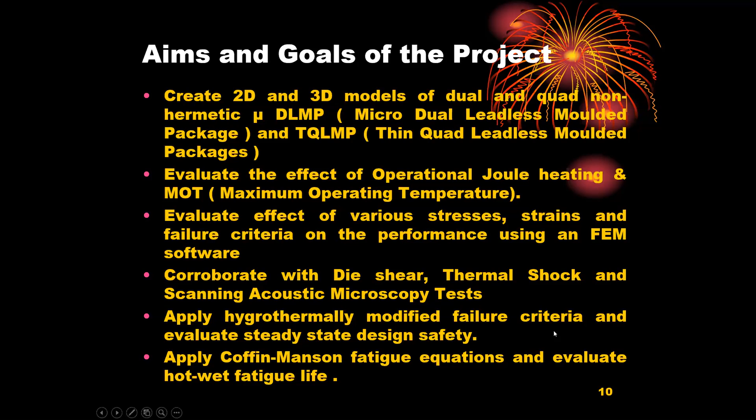In a nutshell, the goal is to conduct a slightly complicated novel electro-hygrothermo-mechanical steady state and fatigue durability analysis of the designed, developed, and manufactured micro DLMP and TQLMP IC packages.

Coming to the Microsystems roadmap for those who are slightly away from the subject, I don't presume that everybody is from materials engineering, reliability, and microelectronics.

The miniaturization part actually consists of small outline packages, then quad packages with no leads, quad flat packages with no leads, and then wafer chip scale packaging, known good die packaging, and others.

The high pin count, high speed roadmap is more concentrated on the BGA and the package on package, and then other kinds of system on system, high density, 3D high density, and other packages.

When I completed the work, it was well before 2015. So this roadmap has been constructed keeping my work in mind, and in case there are stalwarts, please excuse me, because a lot of things have happened beyond 2015.

We are looking at QFNs which were beginning to be made, manufactured, and popularized and commercialized after 2005. By 2010 or 2015, they had reached their full growth and maturity. They say QFNs are not meant for decline, I don't know, I'll take a call on it later.

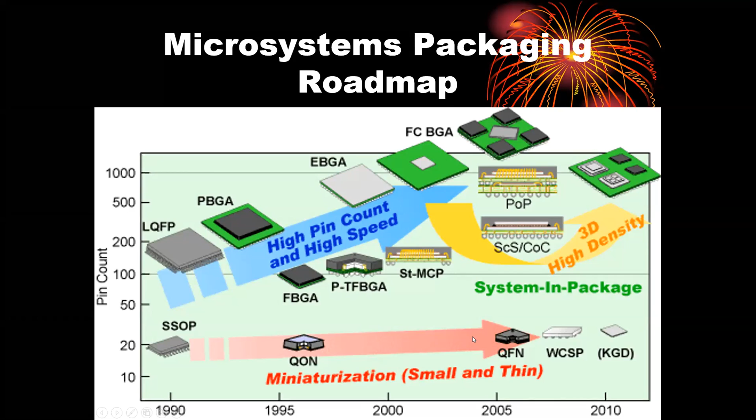Coming to the device applications of micro DLMP and TQLMP ICs, the surface mount technology is the place where you find lots of TQLMPs and micro DLMPs. They are used in video streaming.

They are used in automobiles, biomedicals, mobiles, laptops, tablets, aerospace, and other electronic sensor and PCB applications, where lower speed, lower density, and miniaturization are the characteristics.

So the background of the analysis I want to discuss today consists of certain considerations that were very important before we did the work.

In principle, we are looking at the influence of maximum operating temperature, Joule heating, I-squared-R losses, and these losses that cause thermal strain, which can make the system warp or twist, and the thermal strains in turn cause structural deformation.

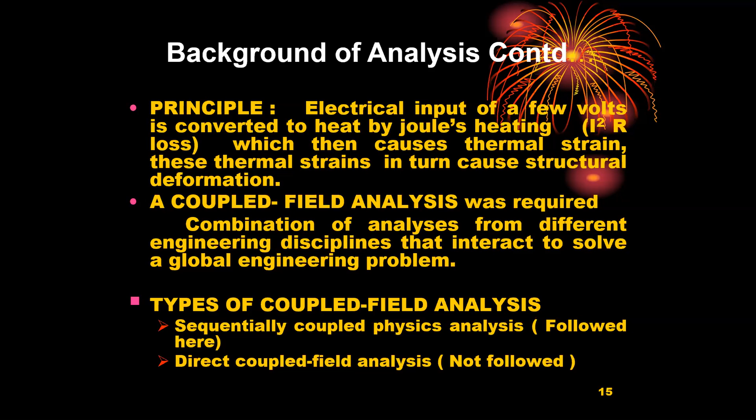We had to do this first in ANSYS: an electrical to thermal analysis, then a thermal to structural analysis, and then incorporate the influence of moisture through analytical tools, and then do a complete failure analysis modified to accommodate the influence of moisture at elevated temperatures, or any temperature up to the MOT and beyond.

So we had to choose what's called a sequential method, as the direct coupled method analysis was not giving us precise results, as the whole process is sequential.

Electrical transient, then steady state situation, leading to a lot of firm thermal strains. And then the thermal strains giving rise to what are called structural stresses and strains. Then we had to find out the influence of Joule heating, or the thermal component due to electrical heating, and the hygrothermal component on structural aspects of reliability, which would not lead to delamination or any undesirable failures.

Even if one wire bonding, gold wire bonding goes bad, it's gone.

So first, we did a steady state thermal analysis, got the job name .rth thermal file out, and then temperatures were input into the structural analysis, where we got the job name .rst out. So we had to do a coupled analysis and then incorporate the effects of moisture into it.

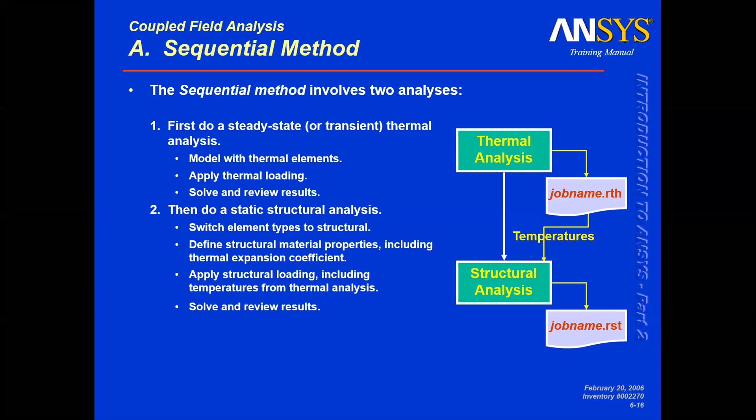Die shear tests were conducted up to the maximum operating temperature to measure the shear strength between the silicon die and the copper lead frame. ICs were to be manufactured and encapsulations were to be molded using RTM. We did resin transfer molding at the company itself.

The thermal shock test of the finished ICs was to be conducted using JEDEC, the A106B test, and modified failure analysis theories were to be applied, including the hygrothermal degradation effects due to operation. Failure theories modified for analysis were Azzi-Tsai-Hill theory and then Tsai-Wu failure theory.

We took these theories as, although these composites were filled and isotropic, they had different tensile, compressive, and shear strengths, very simple. So we thought it would be more precise to go for composite failure theories for particulate heavily filled or particulate moderately filled composite systems.

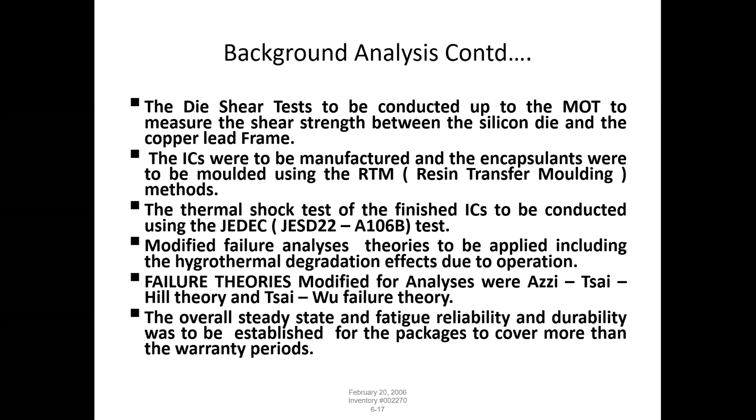So the overall steady state and fatigue reliability and durability was to be established for the packages to cover more than the warranty periods. And coming to modeling, these were the dimensions of the ICs that we were looking at, a few millimeters.

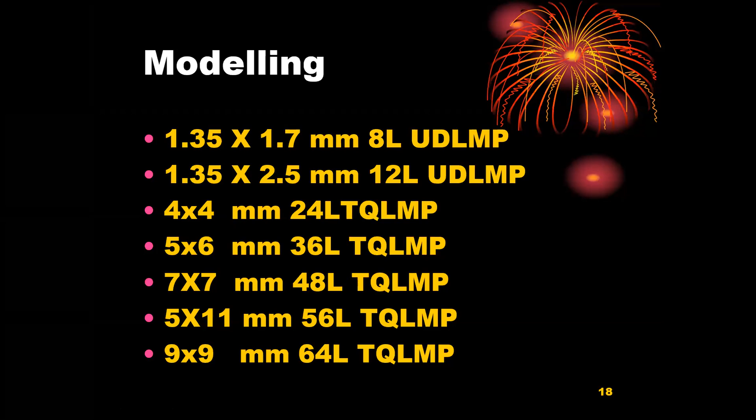The bill of materials consists of such a long list: lead frame and leads being copper, palladium, or copper tin coated frames, with the wire bonding done with gold, and the die, and the other heart of the things being silicon, or extrinsic silicon, which is P-type, N-type doped.

The adhesive for lead frame and die bonding was a silver nanoparticle containing epoxy adhesive. Encapsulation was done using carbon black and fused silica particles filled epoxy and phenolic resin, which is a nanocomposite by present day definitions. So we had to look at nanoscale things also.

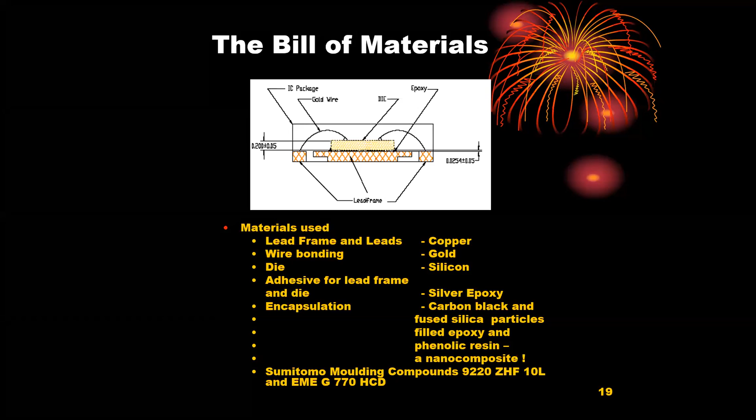Sumitomo molding compounds, two compounds specifically given, were popularly considered, and one of them had an issue if the maximum operating temperature was quite high, so we had to switch the composition of the compound in order to suit the maximum operating temperature. So these are some of the designs.

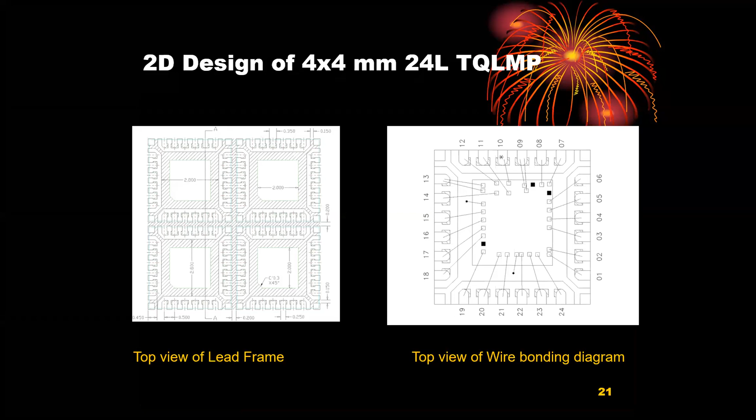The asymmetric design consisted of many kinds of designs, and we also had a lot of symmetric designs. From the 4x4 mm printed circuit drawings, or wire bonding drawings, or the lead frame drawings, we had to construct the 3D drawings. And these are all some of the 3D models that we created.

We deliberately created the ICs with the gold bonding, die pad, die area, and the die, and then the copper lead frame, and then the pins, with and without encapsulation, in order to consider the effect of encapsulation on all the electrical, thermal, and structural properties. So that was pretty interesting, but we had to keep the encapsulation transparent with all properties intact.

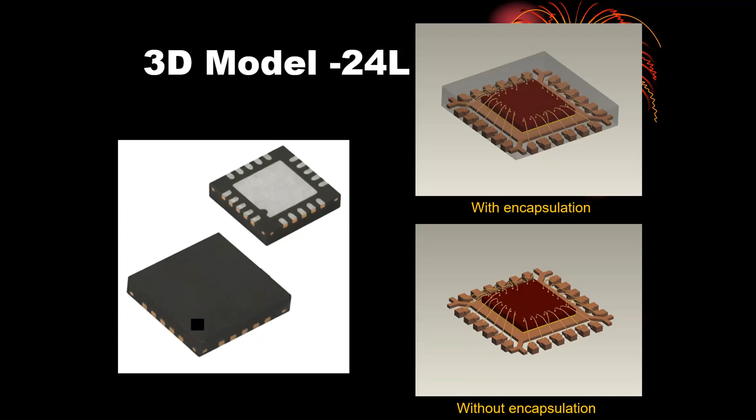So the 3D model of a 64L, like you see the picture of the IC here, which is about 9 mm, and with and without encapsulations, are shown here.

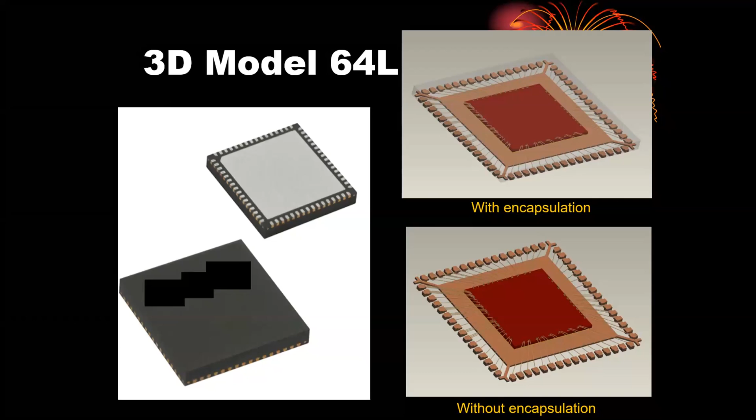Coming to the material properties, these had to be thoroughly understood from the suppliers, or some tests even had to be conducted at the company. So we have to look at Young's modulus, CTE, electrical resistivity, thermal conductivity, and Poisson's ratio.

When we do an electrical to thermal coupled analysis, first we have to take into account the electrical resistivity and thermal conductivity. And then when you do what is called thermal to structural analysis, we had to take into account the CTE, Young's modulus, and then the Poisson's ratio effects within maximum permissible limits.

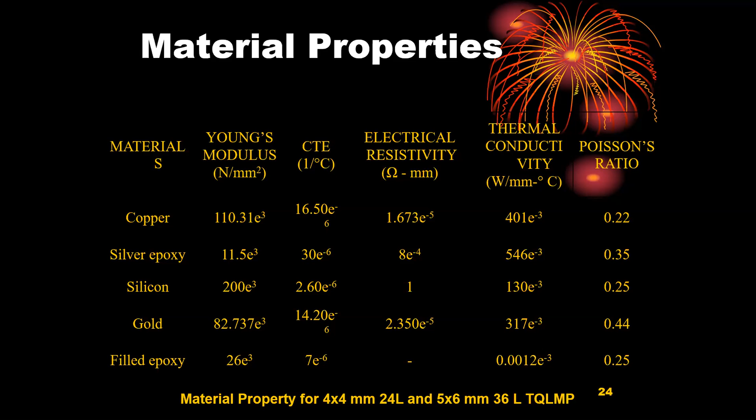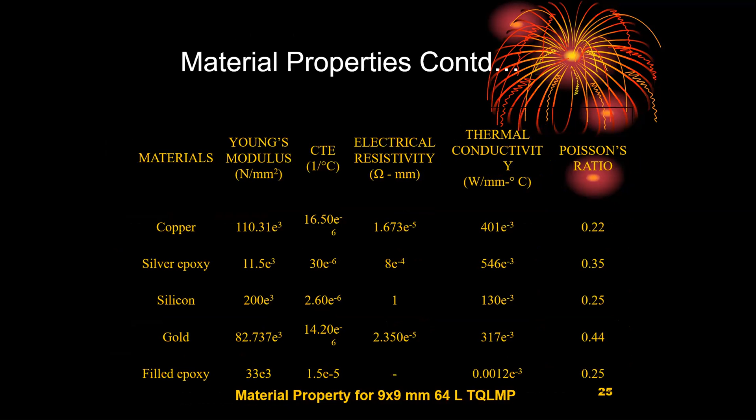That's from MOT till room temperature. We have not done any sub-zero or freezing temperature analysis, which might be worthwhile later. So these are all some of the material properties that we considered, and they are given here.

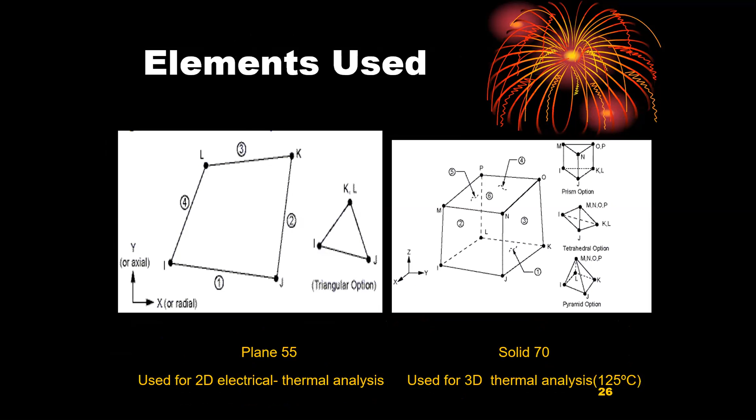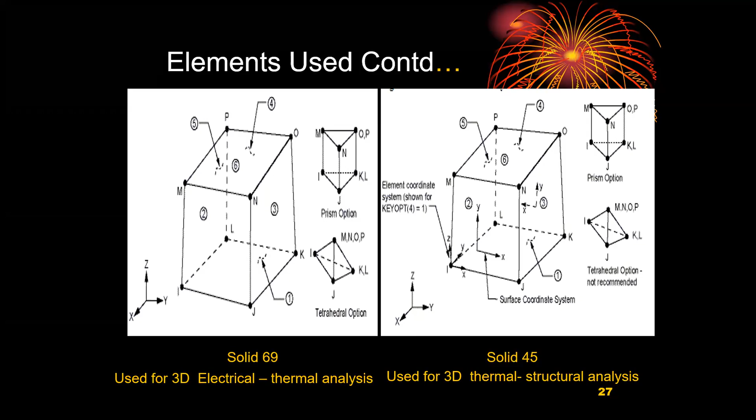And we used all kinds of 2-dimensional and 3-dimensional elements. In case you are interested, you can take a look at these elements that we used for thermal analysis, or electrical thermal analysis, for the 2D and 3D simulations. So these were used for 2D and then 3D analysis basically.

Coming to some of the 2-dimensional results, I said that we looked at micro DLMP and TQLMPs for their reliability first and then durability. So the meshing was kind of free meshing, as it was much better.

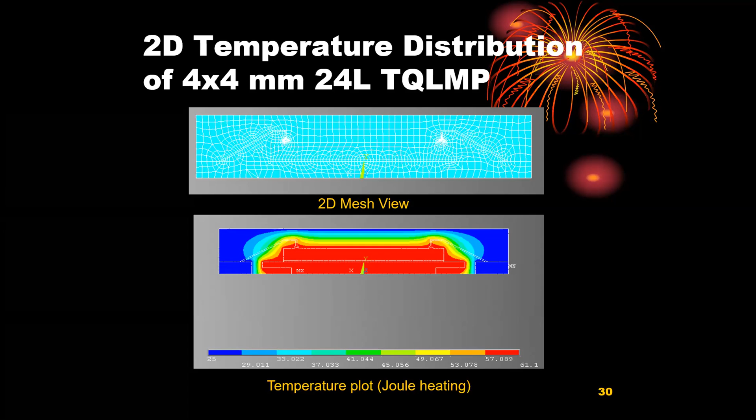So this is how we get the temperature plot or Joule heating, and then maximum temperature obviously is between the copper lead frame and the die, as it has been attached or adhered with silver epoxy. So the silver epoxy is highly conducting, and it just conducts all the heat to the die pad, so we were kind of happy that the maximum temperature was just below about 60 degrees Celsius.

The various maximum operating temperatures in a fully transient or steady state analysis had to first be found out through simulation, as well as we could check how good the simulation was when we did the test with unencapsulated and encapsulated ICs.

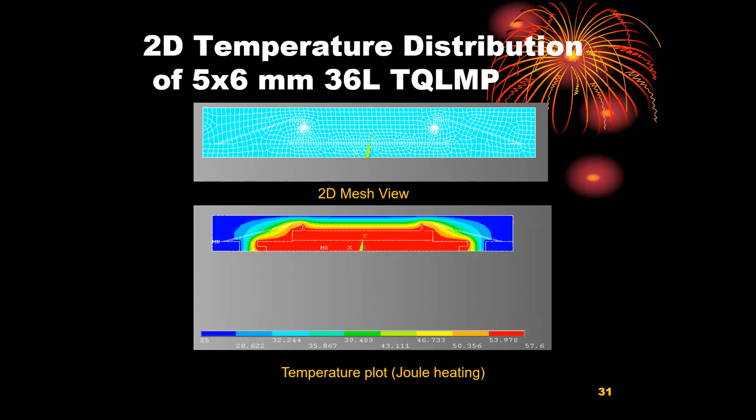So sometimes we get maximum operating temperatures that are kind of threateningly close to the glass transition temperature. I'll come to that later.

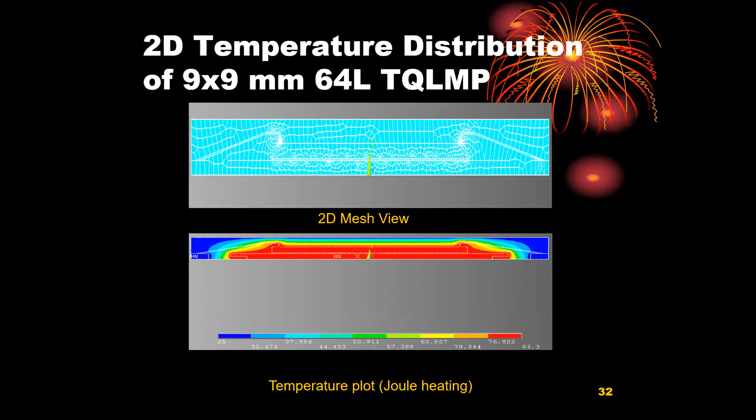Coming to the coefficient of thermal expansion issue, there are methods used for reducing the CTE mismatch between silicon, copper, gold wire bonding, and the encapsulant material. So they all had different CTEs. We had to do what is called a polymer underfill tactic in order to remove the CTE mismatch considerably between the chip and the substrate.

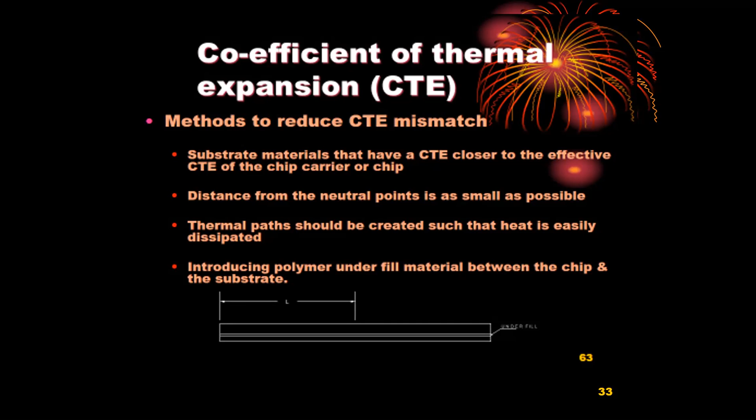The thin quad leadless molded packages, or micro DLMP packages, are very flat, less than 1 mm, most of them. So it was quite easy that the distance from the neutral points were very small, and we could go in for a better CTE match.

Coming to some 3-dimensional meshing results. You see nice, good-looking, asymmetric, free-meshed, fully encapsulated and then unencapsulated IC.

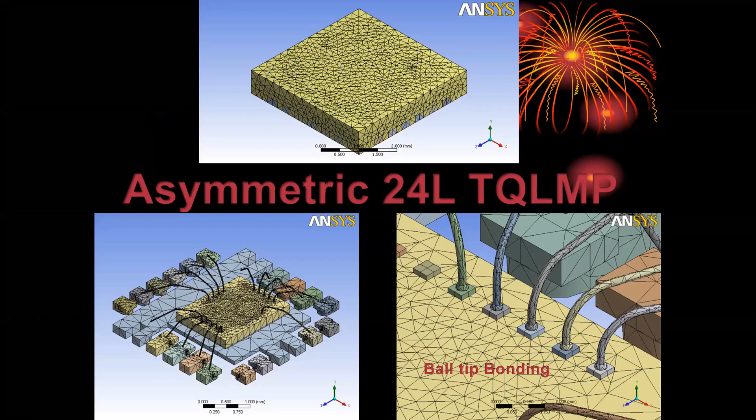We went for a ball tip bonding of the gold wire with the silicon die. So when you press the ball onto the substrate, you get almost a square pattern with a bump. That's what we get from ball tip bonding.

The mesh view and boundary conditions for the 24L TQ-LMP are given. First you consider it at 25 degrees Celsius, then go for the maximum operating temperature. You can also do the analysis at maximum operating temperature or any ambience even in excess, if you're interested.

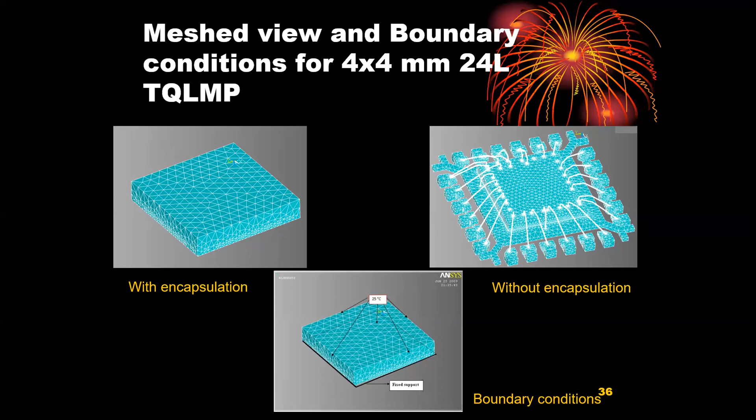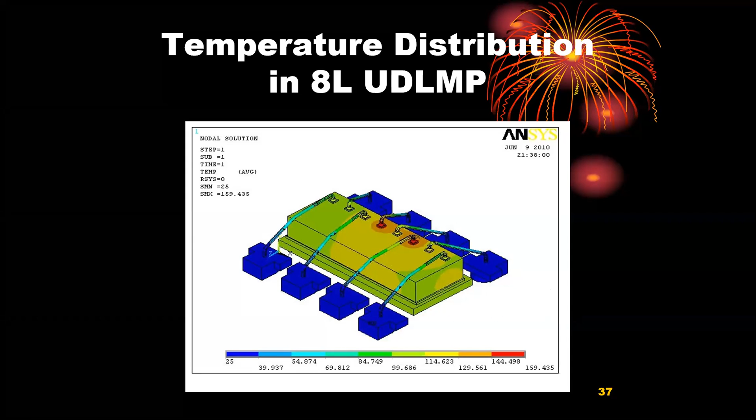This is the picture of the micro DLMP. There was a bit of a problem with the micro DLMP, which was mostly used for video applications. This particular 8-pin, 12-pin, or 6-pin micro DLMP was only 1 or 2 millimeters, or maximum 3 millimeters in dimension. We had to use some fill polymers, and the encapsulation sometimes had to be switched to a better grade, Sumitomo grade filler, to accommodate a safe factor of safety between the maximum operating temperature and the lowest wet glass transition temperature.

This is another picture. Coming to the electric plots and then the temperature distributions, there are a few more results that you might want to check.

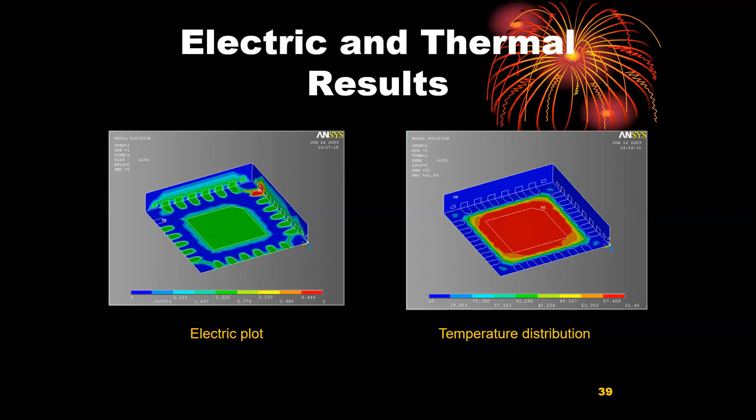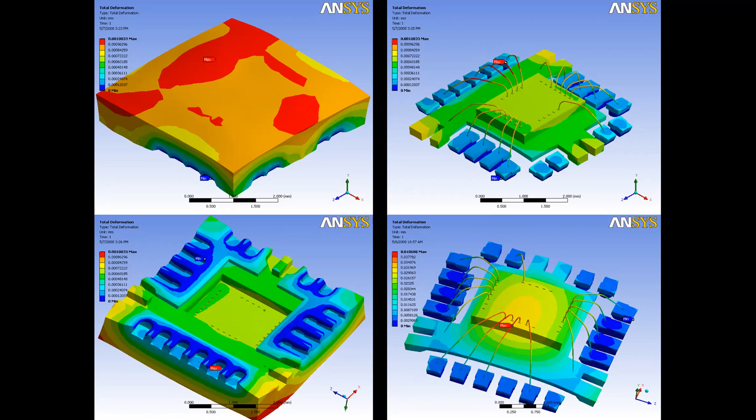The total deformation, interestingly, for such millimeter-based ICs of say 2mm, 4mm, or 9mm, or maximum 10mm dimensions, is about 1, 2, 3, or 5 microns of warping or bending, because of thermal stresses and strains that create some warping. But this small deformation is enough to give von Mises or equivalent stresses of about 200 or 300 megapascals within the IC. So it's very serious.

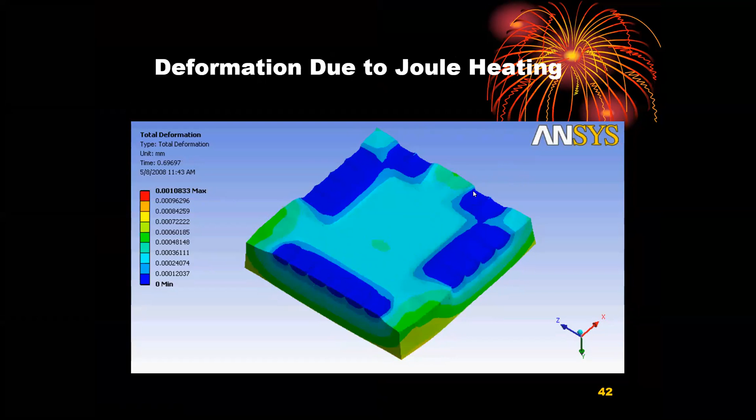So the temperature distribution and deformation simulations are shown here, where you see maximum deformation occurring in the encapsulation area, not near the pin. The deformation is pretty controlled here.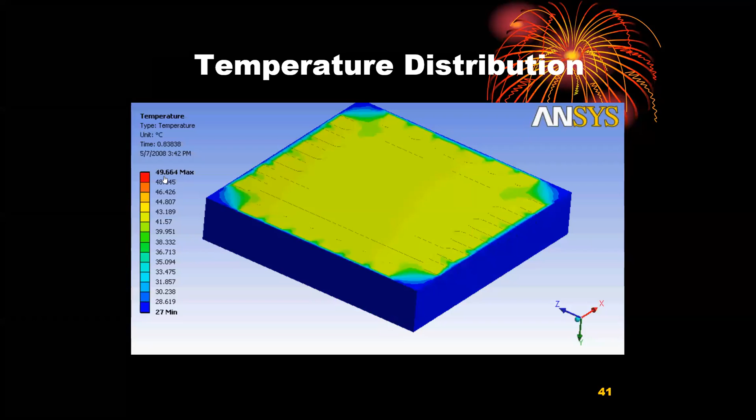Coming to the temperature distribution, we see for a particular IC where the maximum operating temperature is about 50 degrees Celsius, the maximum temperature is near the pin, copper lead frame, and the die attach, as I showed you earlier in the 2D analysis.

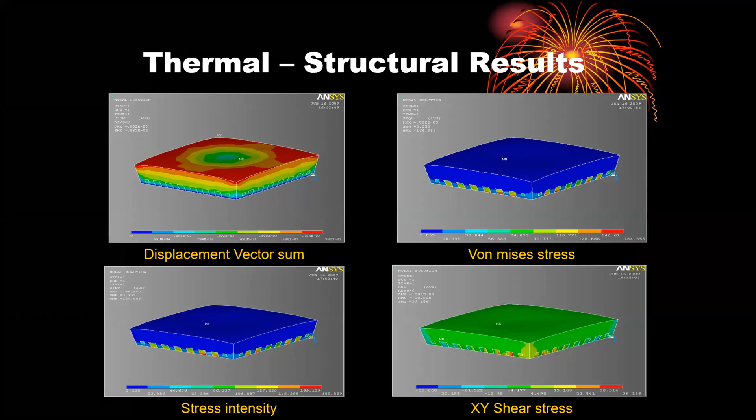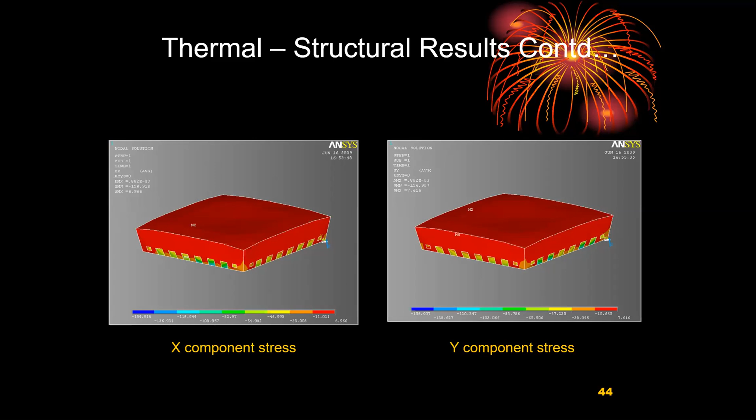The stress intensity factors, XY shear stresses, von Mises stresses, displacement vectors, some plastic strains, stresses, and other things could be deduced from a thermal structural analysis, which was the second coupled analysis that we did. We even focused on X, Y, and Z component stresses.

Coming to the analysis of 4 into 4 mm TQLMP at about 125 degrees Celsius for 24 hours, which is not necessary actually, but we just punished it unnecessarily to see what would happen to the reliability of the IC when you apply failure analysis.

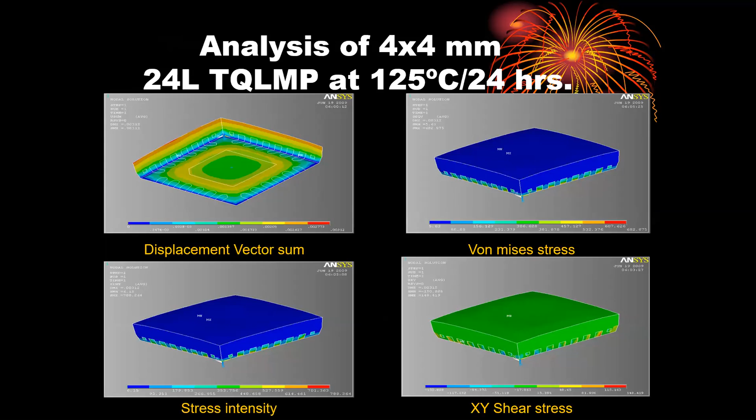The analysis of 24L TQLMP has also given us a lot of interesting results. Based on all these results, we had to go into some experiments to validate most of the simulation. So we had to conduct what's called a thermal shock test, or JESD22A106B JEDEC standard, where the IC packages are baked in an oven at 125 degrees Celsius for 24 hours, and the temperature is spiked to 260 for lead-free products.

Now it's all lead-free, so we don't deal with lead anymore. Most of the plating or other things are all done with tin and tin compounds. So this was the kind of procedure that we adopted.

If the baking temperature is higher than the glass transition temperature at this extreme heat, the package tends to delaminate or fail. So the influence of glass transition temperature on delaminations was pretty strong compared to many other criteria.

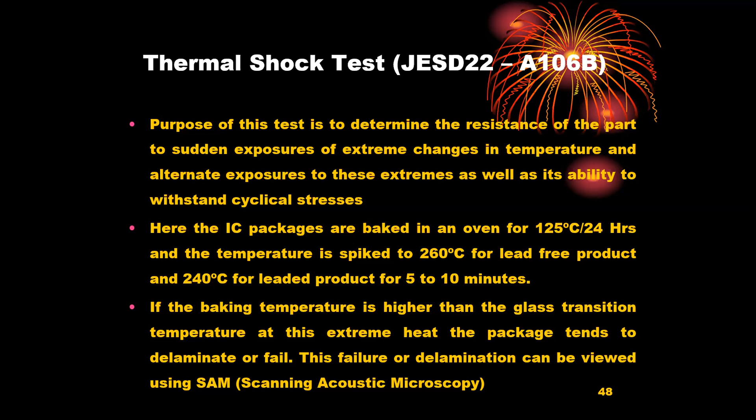Hygrothermal behavior: as we had already done the electrical-to-thermal and thermal-to-structural analysis, we wanted to incorporate the influence of moisture attack at room and elevated temperatures. We know that plastic packages are known for environmental attacks. They are non-hermetic and they reduce their function over time, and mechanical properties degrade. Moisture plays havoc at elevated temperatures in the presence of voids, defects, and in low TG plastics.

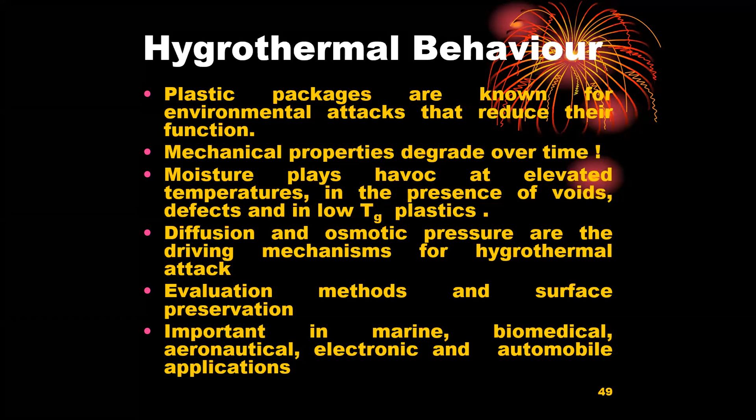Diffusion and osmotic pressure are the driving mechanisms for hygrothermal attack. Evaluation methods and surface preservation are the protective or control methods. It is very important that we do this in marine, biomedical, aeronautical, dental, electronic, and automobile applications.

Coming to the famous Chamis-Sinclaire equation that could be adapted well for linear elastic composites like a nanocomposite, which had fused silica, carbon black, and phenolic and epoxy mixed materials. This particular formula was found to be very precise in matching the simulations with the experiments, predicting both the wet TG and the dry TG.

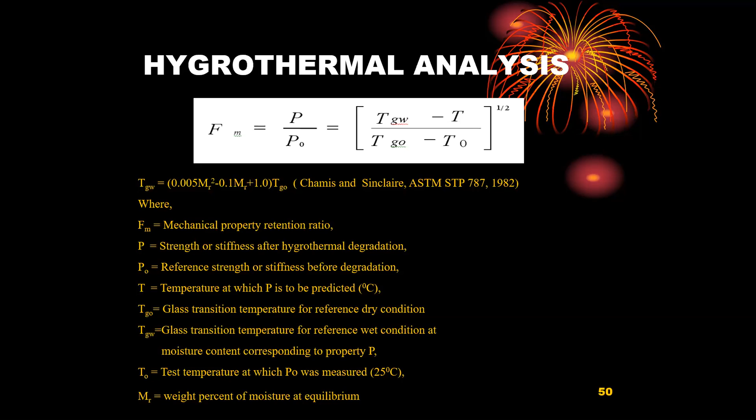As increasing moisture content plays a bigger role in converting the dry TG into wet TG for any plastic material, the wet TG is found to be lower than the dry TG. So normally if you have a dry TG of about 120 degrees Celsius, you might often find that the wet TG is only about 100 to 115 degrees Celsius.

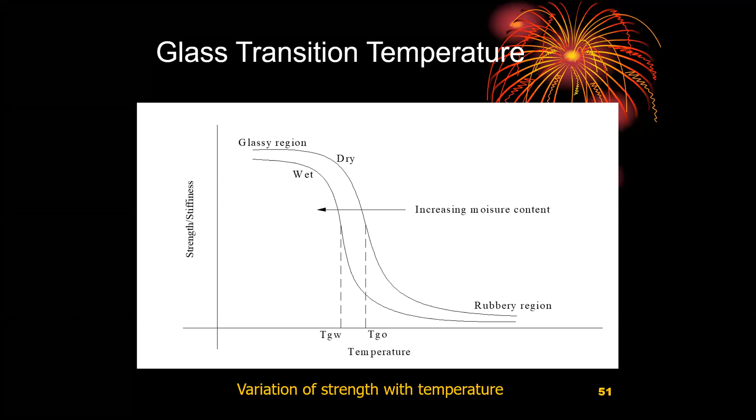When you consider the maximum operating temperature, where moisture susceptibility or moisture take-up is more, we are in for slight surprises here and there, as the maximum operating temperature must be at least lower by a comfortable factor compared to the wet TG of the encapsulant material.

Coming to the retention ratio that was plotted from some quite proven analytical equations, for the various encapsulant compounds, we find that anywhere from 100 to 120 degrees Celsius were the end point, and it was not able to give us a failure analysis based safety factor beyond that.

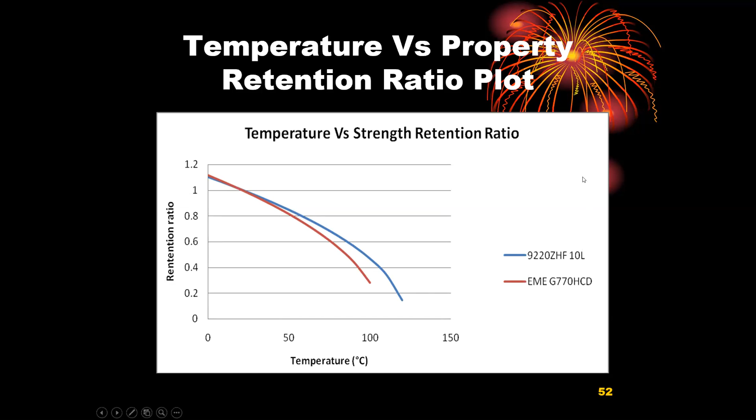Coming to the voltage requirements prescribed by the manufacturers, say 6 volts or 9 volts or 2 volts or 3 volts for the ICs, and the material, bill of materials and the design, we had to look into certain aspects that might have a strong influence on something spilling over.

Coming to the strength again, at about 120 degrees Celsius, the difference between the tensile capacity and the compressive strength is all gone at about 120 degrees Celsius for almost, say, some of the encapsulant materials.

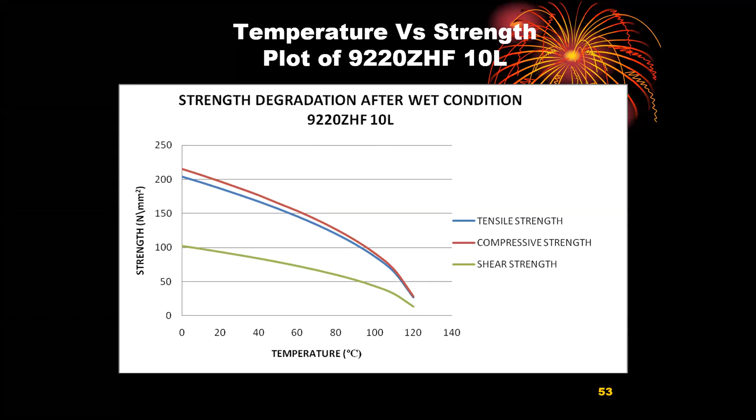Coming to the other encapsulant materials that we also considered, I'm sure a few other encapsulant materials were also considered, but I'm just giving you a hint of how different encapsulant materials play a big role with respect to their wet TG, other things being more or less equal.

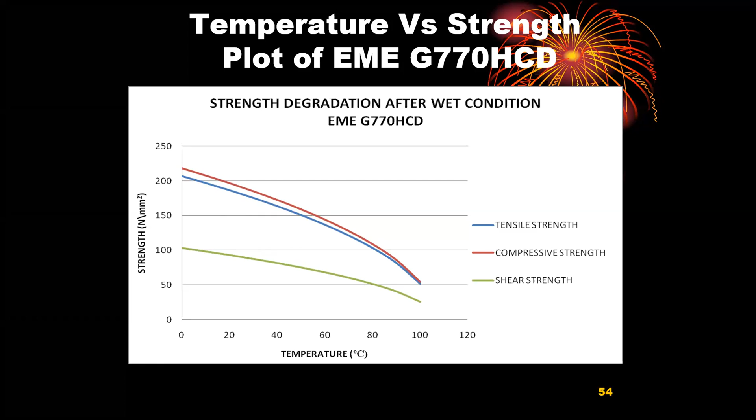As the wet TG plays a big role in the choice of the encapsulant and the process itself, compared to the MOT, or the maximum operating temperature, and the lowest wet TG, or the glass transition temperature, we have to be very careful about choosing encapsulants.

Coming to the die shear test, experimental die shear test, we also had to worry about what would happen to the copper lead frame and the silicon die attached, at the maximum operating temperature, or the temperature up to the maximum operating temperature.

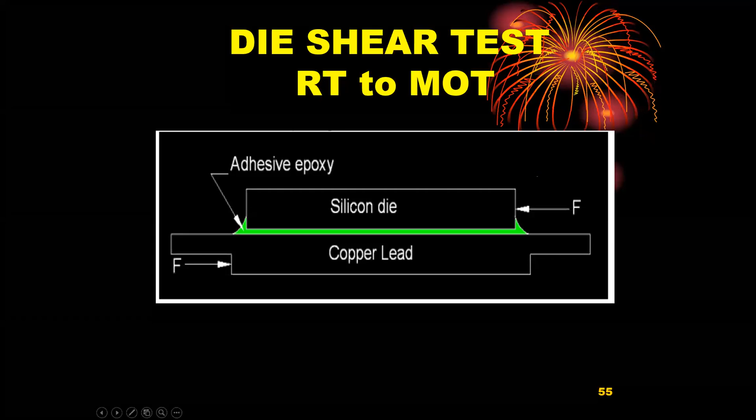So a shear strength of 20 megapascals or 30 megapascals might decrease at the maximum operating temperature of, say, about 50 or 60 degrees Celsius into 5 or 10 megapascals, which may make it very easy for the silicon die to shift and dislodge the wire bonding, or affect any of the constructional integrities. So coming to a simple failure analysis.

Coming to a simple failure analysis exercise with the die shear test for a 24L TQLMP test. This was done for almost all the ICs, but I'm just showing a few examples of how the procedure went on. The maximum permissible shear stress was about 21.875 MPa, or Newton per mm squared, for a given shear area.

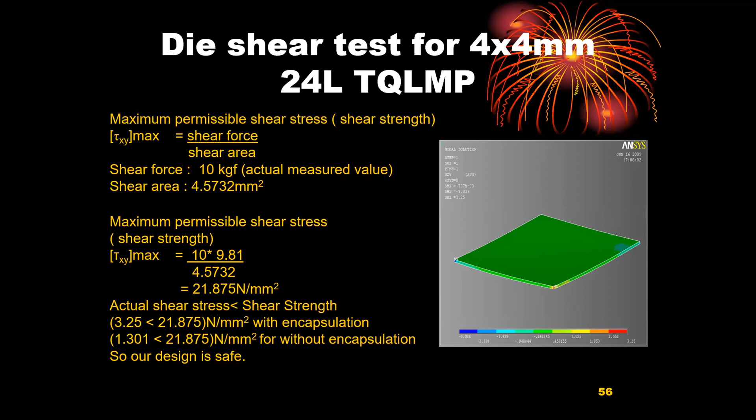Coming to a shear force of 10 kilogram force that was used, the actual shear stress was much lesser than the shear strength. So we were happy that even at MOT, or say 25 degrees Celsius, or any temperature in between, our die and the copper lead frame were absolutely safe.

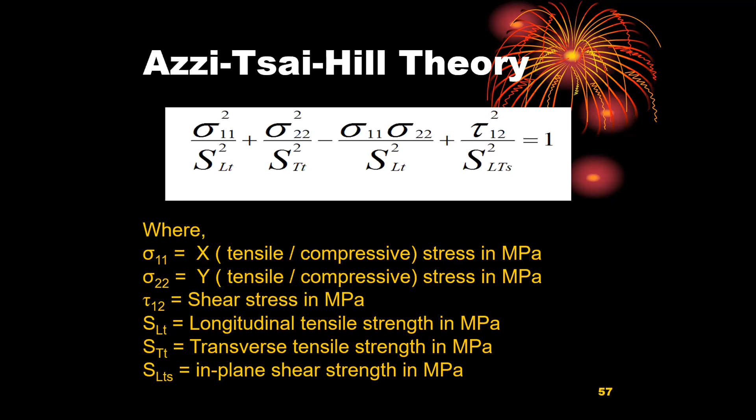Coming to the generated stresses in simulation and the actual test done, we were happy. We applied the Azzi-Tsai-Hill theory and then the Tsai-Wu failure theory, because the compressive, tensile and shear strengths of the encapsulant materials were different, and we had to go in for some of the directional properties also, as it was very thin and behaved like a layer.

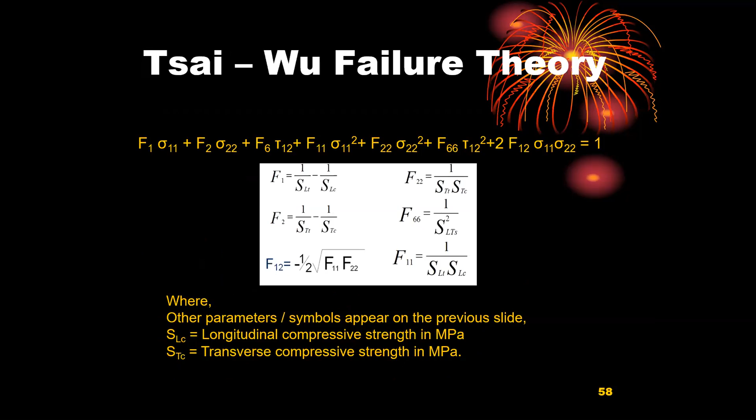When you apply the failure theory, the X stress or the Y stress or the XY shear stress could be considered, and then the tensile, compressive, and shear strength could be considered.

The Tsai-Wu failure theory was applied, and then the Tsai-Hill failure theory was also applied. We were pretty happy with the application of failure analysis theory after considering moisture attack. So when you consider the wet TG formula by Chamis and evaluate the tensile, compressive, and shear strength versus temperature with saturated moisture equilibrium, assuming steady state saturated moisture rate equilibrium, we could apply the failure theory after modification and find out whether it would be a problem at 25, 50, or 100 degrees Celsius. That's what we did.

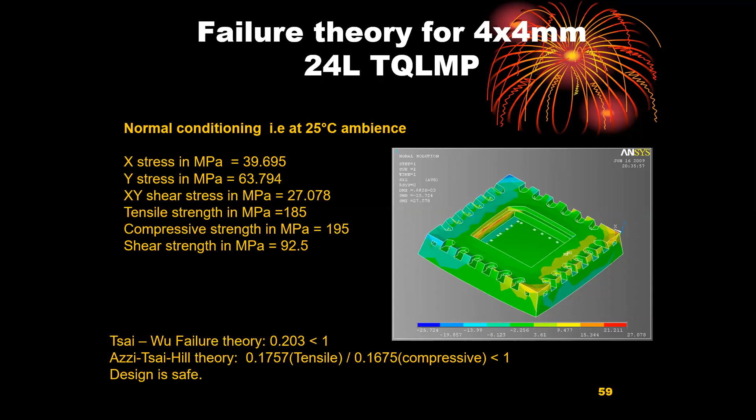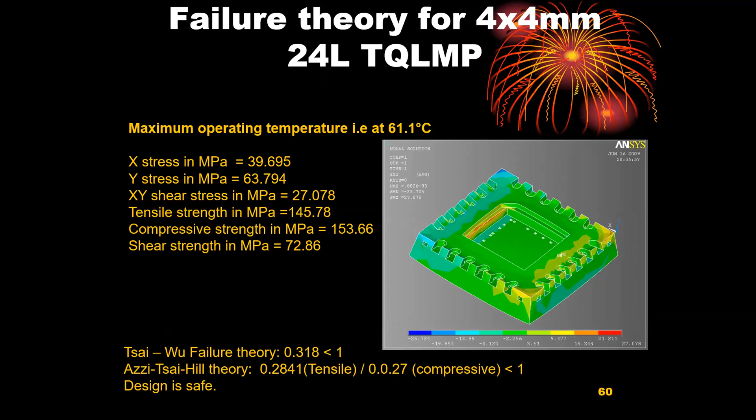Coming to the maximum operating temperature, it was still behaving well. We had an equation with the left-hand side being much less than the right-hand side, so we were absolutely convinced it could survive the maximum operating temperature.

Coming to survivability at a peak conditioning temperature of 125 degrees Celsius, which is closer to the glass transition temperature of some of the encapsulants, there was a problem and it failed. So the survival of it anywhere near the glass transition temperature was a question.

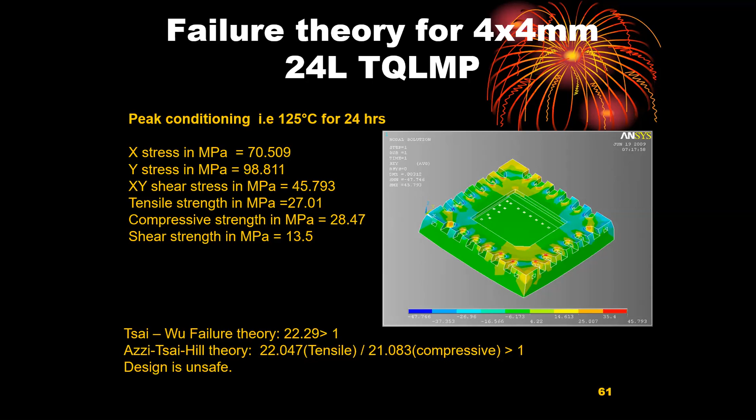We also did scanning acoustic microscopy at about 50 to 100 megahertz, considering the dimensions and the sound frequencies and attenuation patterns involved with the velocity, frequency, and wavelength of the sound. So we used a 50 to 100 megahertz choice.

We could do the scanning acoustic microscopy with plasma cleaning or without plasma cleaning. When we did the plasma etching or plasma cleaning of the materials, we found it was actually better, as it did not give rise to any oxidation or contamination. The adhesion or wettability was much better, giving rise to fewer delaminations.

Once you put it in the thermal chamber with the JEDEC test prescriptions, from 125 degrees Celsius to a sudden thermal shock to 250 or 260 degrees Celsius, it was slightly better. For a set, we had 8 failures, which became 4 or 5, and so on.

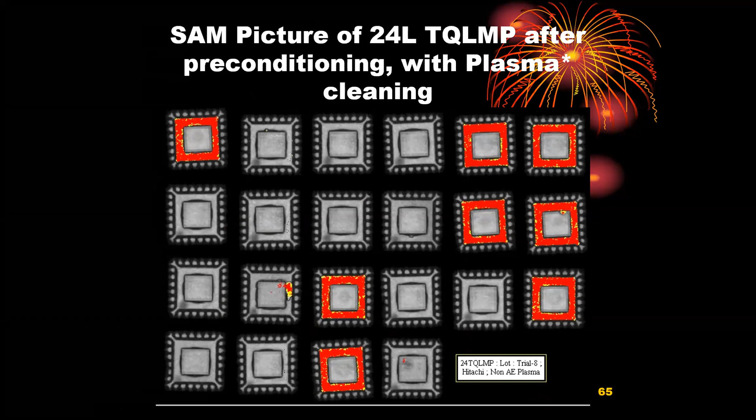At elevated temperatures, you see movement of even the wire bonding, and lots of die-attach problems with the copper lead frame itself. That is deliberate, in order to punish it and see how far it would go, and what would be the prescription even from maximum operating temperature to, say, something like the lower wet glass transition temperature.

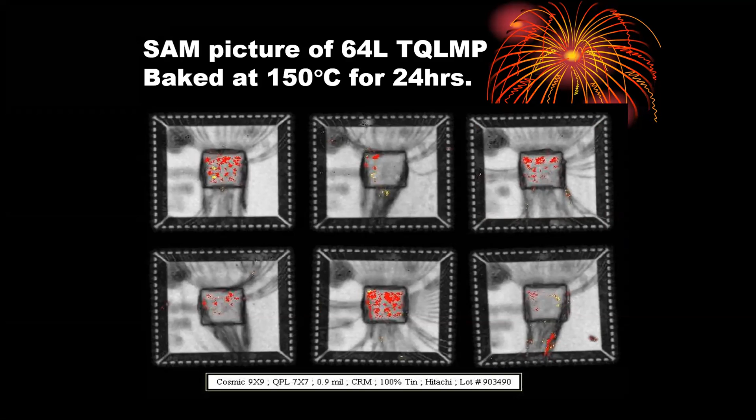Well, there is an interesting ASTM STP D 5229 rule. Coming to almost the end of my talk, I'm very happy that despite starting a bit late, I will be finishing within time.

ASTM STP D 5229M has a rule: the maximum operating temperature of the material, device, or component should be at least 25 degrees Celsius lower than the lowest TG, normally wet TG. Dry TGs are higher, and wet TGs are kind of lower for plastics after saturation equilibrium, at least for the material. In this case, the mold compound qualifies this clause.

The maximum temperature developed due to Joule heating is about 83.3 Celsius. For some of the TQFPs, it was as high as 83. So Joule heating was found to give a maximum operating temperature of about 83 degrees Celsius in the 64-pin TQLMP. Size plays a role obviously sometimes, but not in micro QFPs, because the voltage you have to give for a micro QFP played a big role. Like a small 1mm or 2mm package taking 6 volts was too much for it.

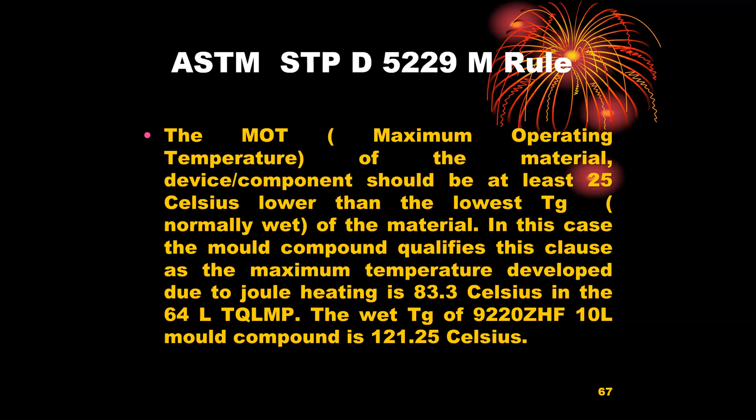Fatigue durability, coming to the last part of my work. Coming to fatigue, this is a very interesting open-ended topic, and I just want to leave a few loose ends free so that we think aloud about it.

Fatigue is the most common failure mode in IC packaging. The IC device dissipates heat to its surroundings during operation, and differential thermal expansion generates stresses in the interconnecting structure.

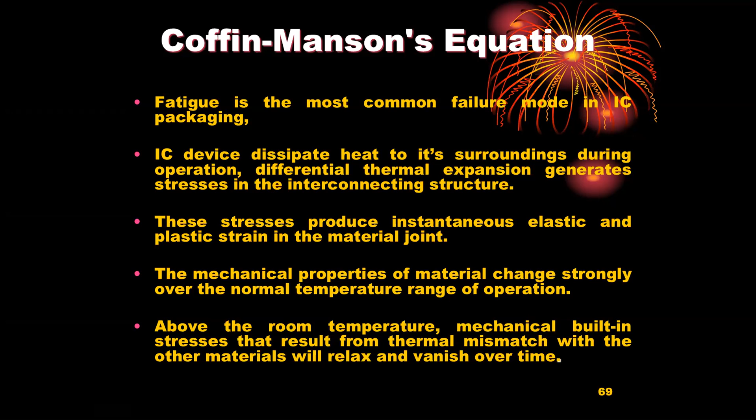These stresses produce instantaneous elastic and plastic strains in the material joint. As the mechanical properties of the material change strongly over the normal temperature range of operation, the room temperature mechanical built-in stresses that result from thermal mismatch, especially with other materials, will relax and vanish over time. That's one good and bad aspect. So cyclical plastic deformations change the grain structure or weaken the joints, and then they can lead to fatigue.

The time of joint fracture depends on relative deformation, strain, temperature, and frequency of deformation. So a simplified Coffin-Manson relation would be: number of cycles, raised to a power, multiplied by the relative deformation or plastic strain, will be a constant. As fatigue goes by, it embrittles the structure, giving less and less plastic strain, and there are a few issues with this.

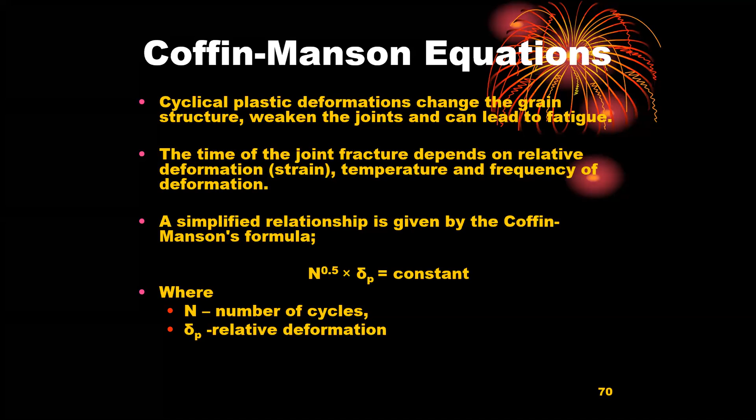Coffin-Manson fatigue versus CTE, this is taken from Tummala's book, the wonderful book on microsystems. He's also one of my super seniors from the Indian Institute of Science. So this is a beautiful relationship where fatigue life versus coefficient of thermal expansion is plotted.

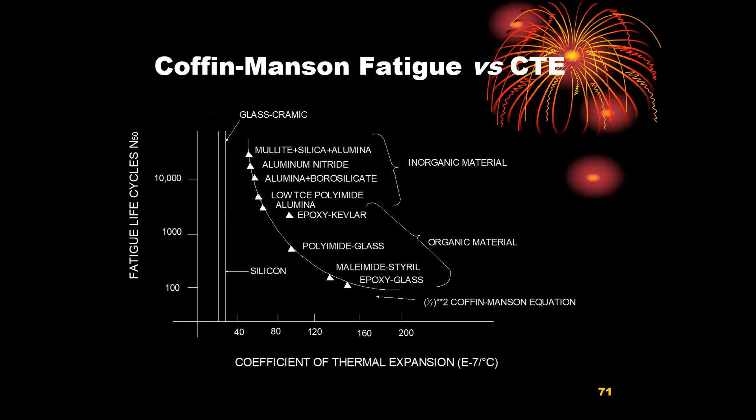Well, so we had to look at the plastic strains, total strains, and the component for one cycle. Let's say you just switch on, allow a PCB board or a system to arrive at the maximum operating temperature, and then after steady state you switch off - that's one fatigue cycle.

So like every day, if you're a hyper user, you switch on and switch off 5-6 times a day. Otherwise some leave it on and it's in steady state for a longer time, then you just switch off at night. So normally we assume cell phones are never switched off, very rarely, but laptops and desktops are switched off more often. So we had to take such things into consideration.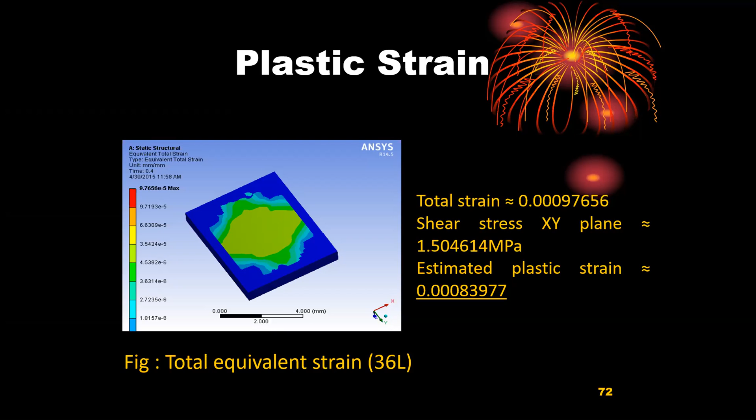And the total strain and the plastic strain were all calculated. And we had to go back and find the weakest bimaterial interface at which delaminations occur first, and where they occur we had to check - it was normally in the copper lead frame encapsulant pad area.

Most of the preconditioning experiences have revealed that more than 90% of the failures occur in the pad area interface.

The following plot, this is a Coffin-Manson fatigue graph created to predict the lifetime of the IC packages investigated here. When we plot plastic strain versus the number of cycles, it's not an SN plot, it's different from an SN plot. And we find that the plastic strain severely comes down even after, say, about 50 to 100 cycles of normal use.

Normal use is kind of 1 to 5 cycles a day. So we find that even after 100 cycles, the plastic strain is severely reduced because fatigue normally makes the material a lot more embrittled, and it sucks off a lot of plastic strain.

But what happens is that when plastic strain is removed at elevated temperatures, each time you fatigue cycle from room temperature to the elevated temperature or maximum operating temperature, because of cycling, the moisture susceptibility increases.

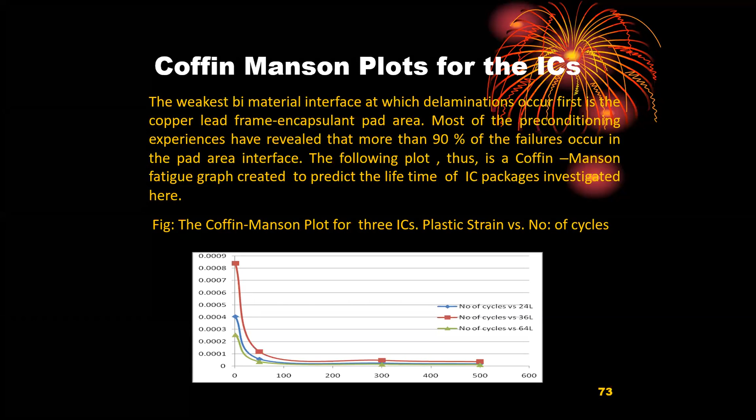So we find that though we did Coffin-Manson analysis, this is an open-ended question, and I'm doing more work on this. As the plastic strain reduces, I'm going to finish in the next 1 or 2 minutes, thank you so much.

As the plastic strain reduces with cycling and only a small value of strain remains after a few tens of cycles at MOT, thereby slowly embrittling the encapsulant in the process, the overall deformation or strain which is simulated or measured for a single steady state cycle will be very high. With cycling, the total deformation or strain reduces and reaches a steady but low value.

Reaches a steady but low value. The plot resembles an endurance S-N plot for ferrous material with a limit, so it goes on flat. If anything happens below that, it doesn't fracture.

Because of severe cycling and then some more plastic strain being added in a cyclic manner, it could be some kind of an attenuation pattern like a curve, where the plasticity is slowly removed with more and more fatigue. The same moisture susceptibility is maintained, but the plastic strains are not able to survive because of severe embrittling of the material as fatigue goes by. So I want to do some modeling and studies on that.

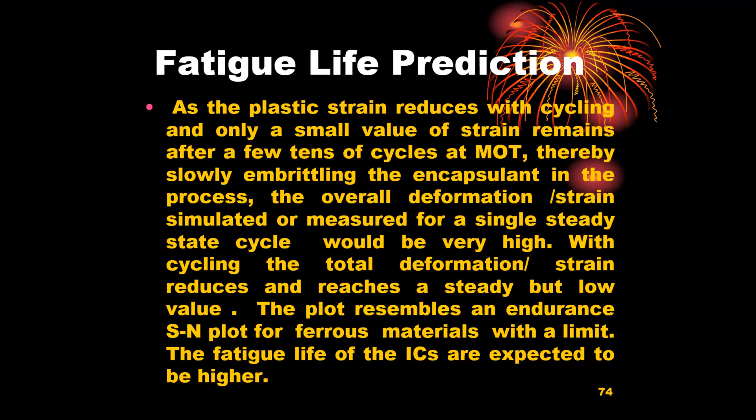The fatigue life of the ICs is expected to be much higher than what we got with Coffin-Manson, which was definitely conservative. So coming to the design philosophy and pyramidal substantiation, the product we hope is reliable.

Beneath that, the subassemblies and assemblies are tested the least, and beneath that the subcomponents and components are tested less often, while the test specimens are tested more often: wafer, then chips, then assemblies, then motherboards, and other kinds of motherboards, with the sub-assemblies tested least. Finally, we hope the product would survive better, and very few cell phones are tested. This is called the pyramidal substantiation of survival, durability, and reliability.

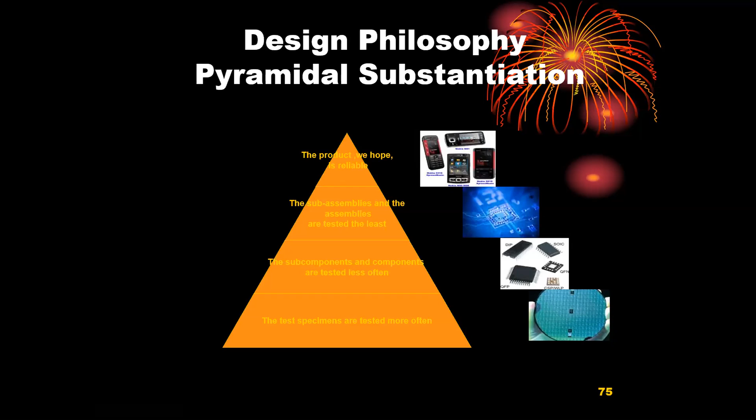Summary and conclusions: we did the modeling of some micro dual and TQLMP IC packages, and we did thermomechanical analysis of IC packages after Joule heating using FEM software.

We did die shear tests, JEDEC tests, scanning acoustic microscopy tests, and hygrothermal behavior analysis and validation through failure theories for all the packages.

We also did static and fatigue design durability tests and analysis during operation at MOT and beyond. The operation of the ICs at an elevated temperature was also analyzed to find out where it would start failing above MOT, whether the criteria of MOT being at least about 25 degrees Celsius lower than the lowest TG or wet TG was satisfied or not.

Some of the salient milestones are that the complete CAD design, FEM simulation, development, manufacturing, testing, validation, and marketing were 100% indigenous at that time.

It was a joint effort of SPCE Chennai. I happened to meet Dr. Krishnaswamy Srihari at SPCE when he paid a visit in 2007 or 8 or around that time, and we were just about to do this work. I'm very happy that he is listening.

It was a joint effort of SPCE, VIT, and SPEL. The entire IC packages produced as an outcome of the project were for the foreign market with a cradle to cradle lead time of less than 5 years from development to commercialization.